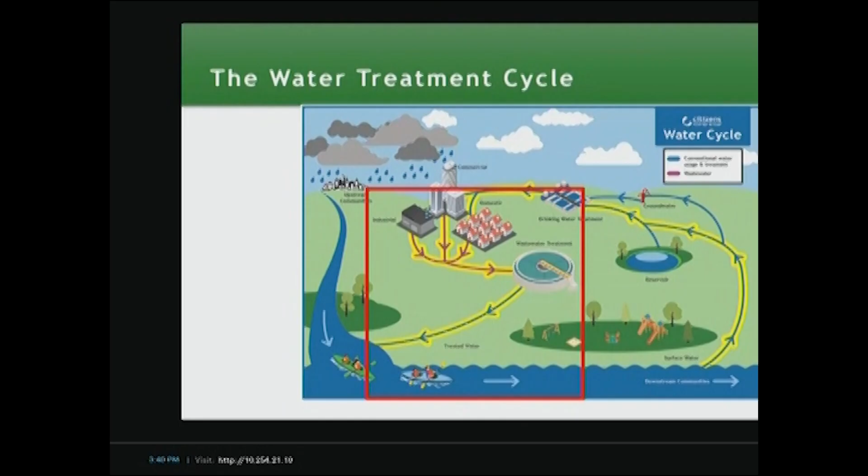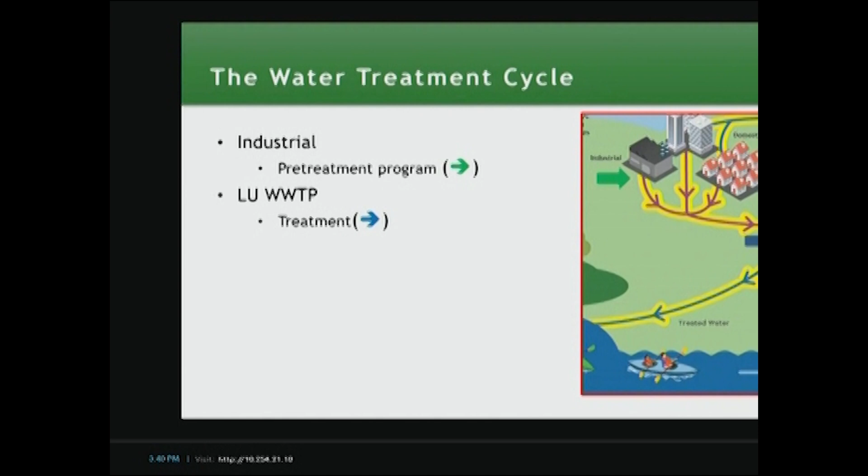The water cycle itself is protected in a couple different ways, which we'll describe each of today, and that is both via the industrial pretreatment programs that are in place by Lebanon Utilities, as well as the Lebanon Utilities wastewater treatment plant.

Overall, what we're here to talk about is watershed thinking. We're bringing water from the White River watershed into Lebanon, which is in the Sugar Creek watershed. Instead of returning that water solely to the Sugar Creek watershed, we're going to recycle it back into the White River watershed to return it to its source of origin.

Ultimately, the goal for this is to sustainably provide water for central Indiana, to protect Eagle Creek and the watershed's water quality, protect the Eagle Creek reservoir water levels, and continue the relationship that Citizens has had for over 70 years in the operation of Eagle Creek.

The water that we're talking about today is treated water. It's governed by a strict NPDES permitting process implemented by IDEM. Water must be regularly monitored to confirm that it is fit for both human and ecological health, so we're not impacting either.

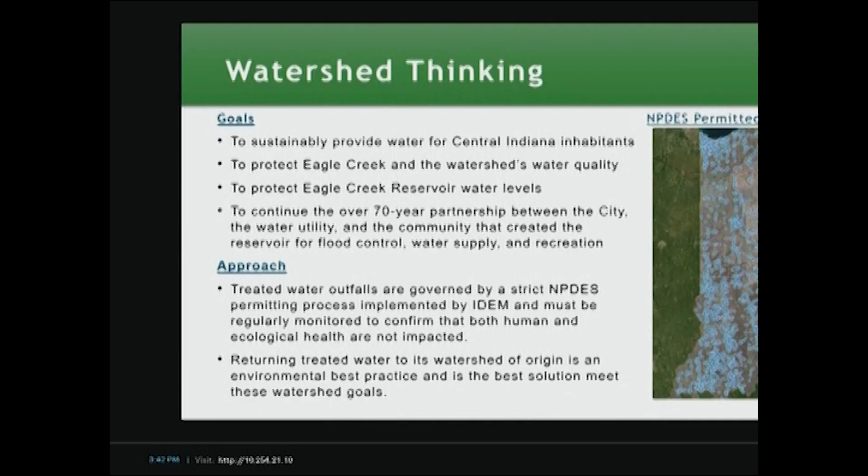Returning water to its watershed of origin is an environmental best practice, and it's the solution to meet these watershed goals. The figure to the right demonstrates how many different water reclamation facilities there are throughout the state of Indiana.

I'd like to make sure we're talking apples to apples with some key definitions today. Drinking water: water that's been disinfected to a drinking water standard. Wastewater: water, either municipal or industrial use, that has not been fully treated. It's been used and is being returned back to a treatment process.

Clean water or treated water is water that's been fully treated through a publicly owned treatment works. An indirect discharge is an industrial discharge that is discharged to a POTW, meaning it's not directly discharged to the environment. A direct discharge is a POTW that is returning water to the environment via a water body.

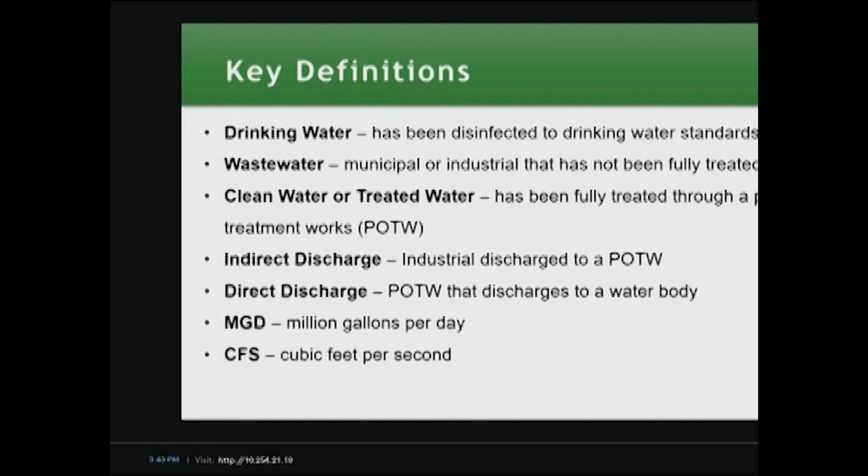The units we talk about commonly are millions of gallons per day of wastewater flow, or cubic feet per second. When we talk about water in the environment or stream flows, we typically use cubic feet per second. When we talk about wastewater flows, we use millions of gallons per day.

The expansion for the Lebanon wastewater treatment plant is coming in three phases. Phase 1 is from 5 to 10 MGD, due to be complete January 1st, 2027. Phase 2 is from 10 to 15 MGD, due to be complete January 1st, 2028. Phase 3 is 15 to 20 MGD, scheduled for sometime in 2031.

These expansion increments meet the LEAP, or the water being supplied to Lebanon by Citizens. The treatment plant is being done with biological nutrient design. It's going to provide full tertiary treatment as well as ultraviolet disinfection for all waters, and some segment of those waters will be returned back to the White River watershed.

When we talk about the watershed balance, what we're depicting here is the watersheds, or where the water ultimately goes. The difference between Sugar Creek and the White River watershed, although both return to the Wabash River, is that Sugar Creek flows west and then to the Wabash, while the White River flows southwest through the southwestern portion of the state.

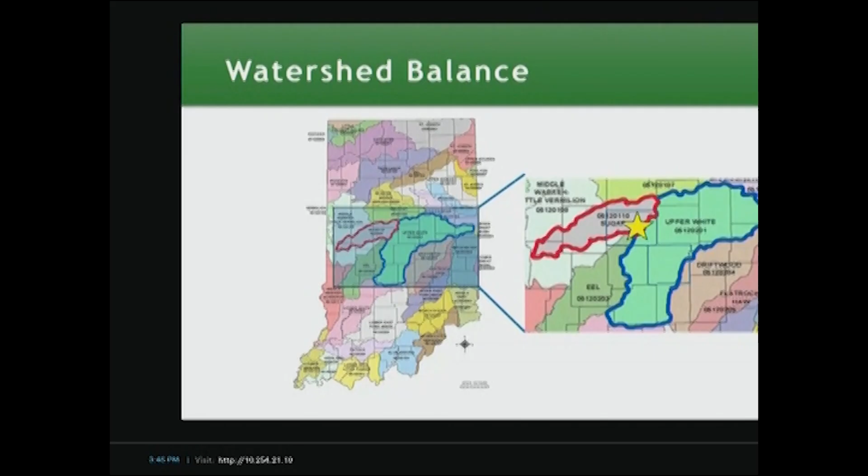What's critical here is that not only are we returning water back to Marion County, but we're returning water back to all the counties downstream of Marion County as well. There are multiple drinking water and other water uses of that water as we move downstream.

The watershed balance, or the reason we're doing this, stems from a water supply and interlocal cooperation agreement between Citizens and Lebanon Utilities to try and maintain that water balance. What's being considered is an average conveyance of 15 million gallons a day, or a peak conveyance of 25 million gallons a day, based on how much water Citizens is providing to Lebanon.

From a Lebanon perspective, the wastewater treatment plant's treated water conveyance will either go to Prairie Creek, the current location for discharge, or back into the upper White River watershed via Eagle Creek, which is the proposed additional location for the effluent force main discharge. All of this water is regulated by the Clean Water Act from the EPA.

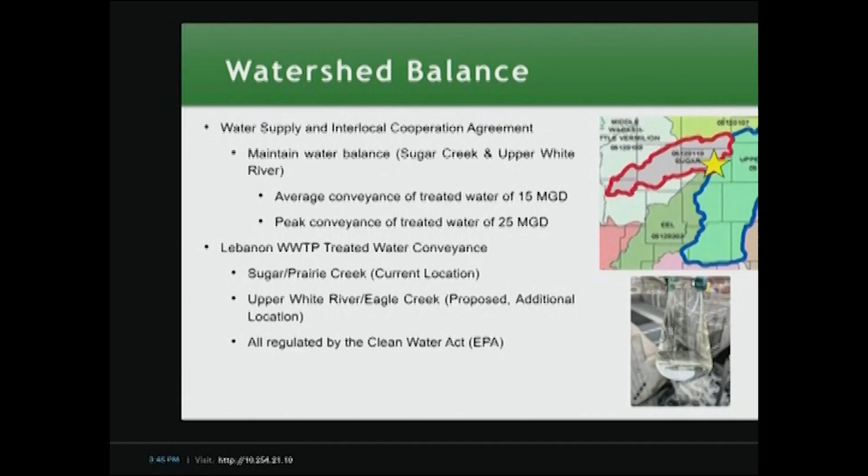When we considered where to discharge this water, we looked at the Upper White River watershed immediately adjacent to Lebanon to figure out where we could safely discharge this much water. From that, we reviewed 7 different potential locations based on routing and proximity to Lebanon, evaluating both hydraulic capacity and water quality.

Selection of the most suitable outfall locations was based on several criteria, but primarily stream flow, because we want to understand the implications for the stream as we return this much water. In low flow conditions, we recognize we will become the stream, and we don't want flooding implications during high flows either. We don't want to impact people in low flow or high flow conditions.

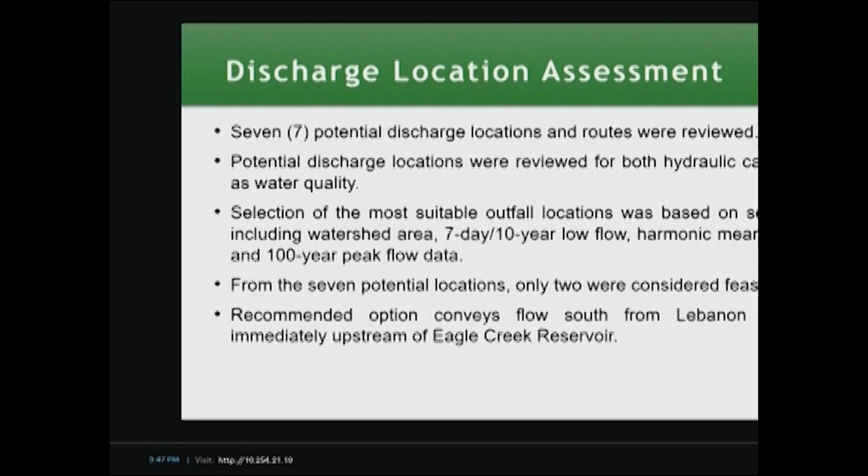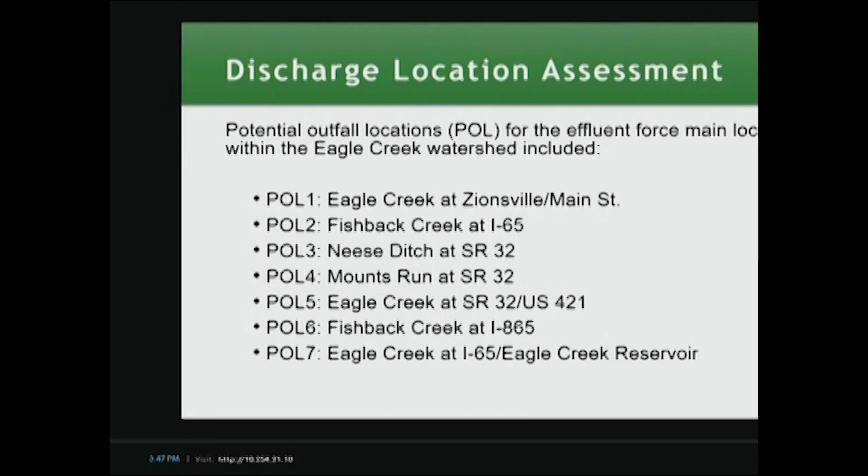From these 7 potential locations, really only 2 were considered feasible. The recommended option was to flow south from Lebanon and discharge immediately upstream of Eagle Creek. The 7 locations we reviewed were: Eagle Creek at Zionsville, Fishback Creek, the most adjacent location, Neese Ditch, Mounts Run, Eagle Creek at 32 and 421, Fishback Creek at 865, and Eagle Creek directly in the reservoir.

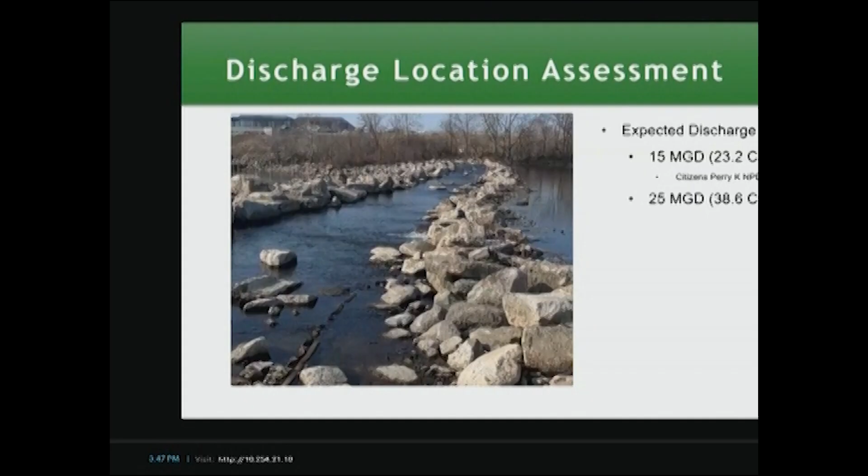One helpful thing for folks is to picture what the volumetric flow looks like. 15 million gallons a day seems like a very large flow, and that's 23 CFS. So when we look at what 15 million gallons a day looks like in the environment, this is a video demonstrating that flow as it's released into the environment, from a facility discharging into the White River.

Just for context, you walk at about 3 feet per second. So if you take a standard door and flow 15 MGD through it, that flow would be moving at about 2 feet per second. So from a volumetric perspective, that's an idea of what that looks like.

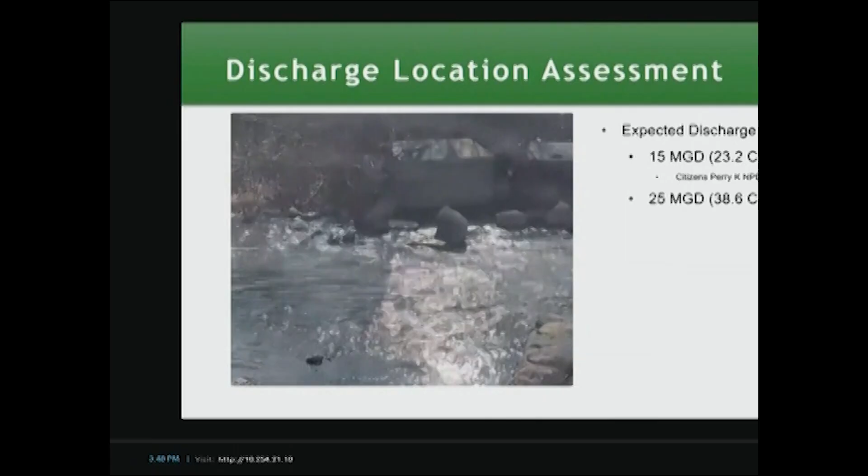Looking at the different stream statistics, the overall driving force that took us to the Eagle Creek Reservoir was recognizing we would, in many cases, be the stream - not unique in a wastewater discharge situation. But generally the upper limit, the flooding concern, was what really drove us down to Eagle Creek, since many streams immediately proximate to Lebanon simply can't handle this much volume. That's why we had to go south to Eagle Creek.

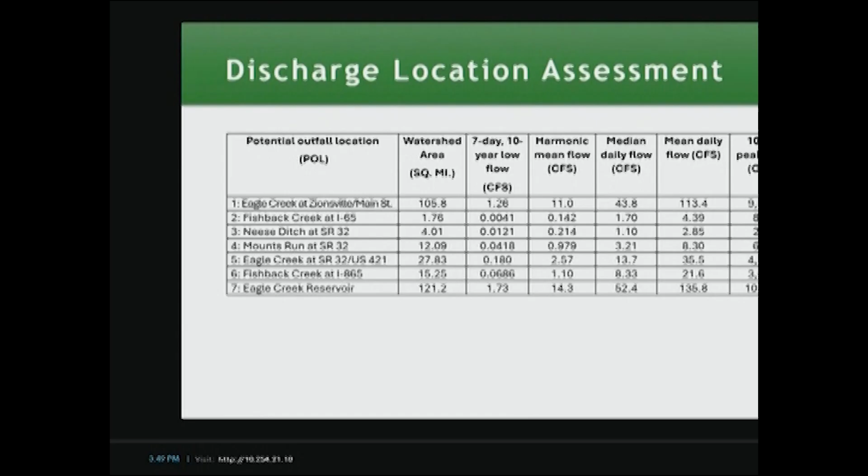Looking at the different statistical flow variations in the creek, the 23 CFS we're proposing to discharge at Eagle Creek Reservoir into Eagle Creek means that in low flow conditions we will be a significant portion of the stream, but during high flows we'll only be a fraction of it. On a percentage basis, we'll be about 44% of the stream during low flow conditions, but during flooding conditions we're somewhere between 1 to 0.2% of the stream. So realistically, from a flooding perspective, there's very low risk there.

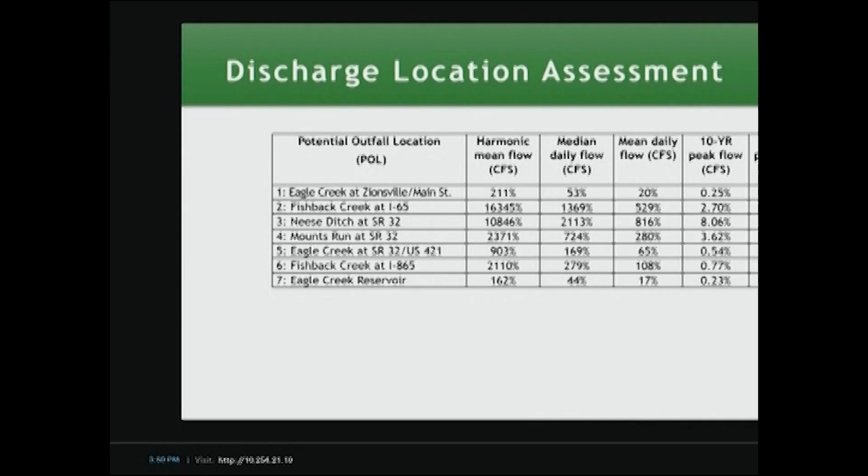From a project perspective, on the schedule we're on, we submitted a PER in January of last year. We're in the process of design, we have survey done for potential routes and are evaluating those now. Right now we're working on an anti-degradation demonstration that we'll describe shortly. We're anticipating being in operation by January of 2029.

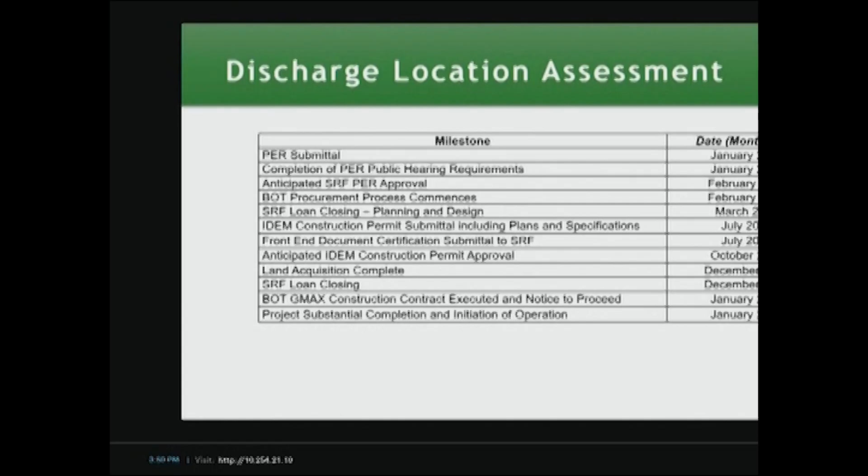So let's take a step back really quick. We've talked about the volumetric perspective - let's talk about the protections for water quality. We're going to start with treatment at the POTW, and then move upstream to talk about industrial protections as well.

Treatment is governed by what is called a National Pollutant Discharge Elimination System permit, or NPDES permit. Ultimately, this permit is designed to ensure the discharge does not hurt water quality or people's health - that's what this permit does. The other important concept to remember is that everything we do from a regulation and wastewater perspective is at the end of pipe. So all the water quality criteria we have to meet is directly measured at the end of pipe and doesn't have the advantage of dilution - it's directly what we contribute to the stream. And when we are the stream, that water quality has to be met at all times.

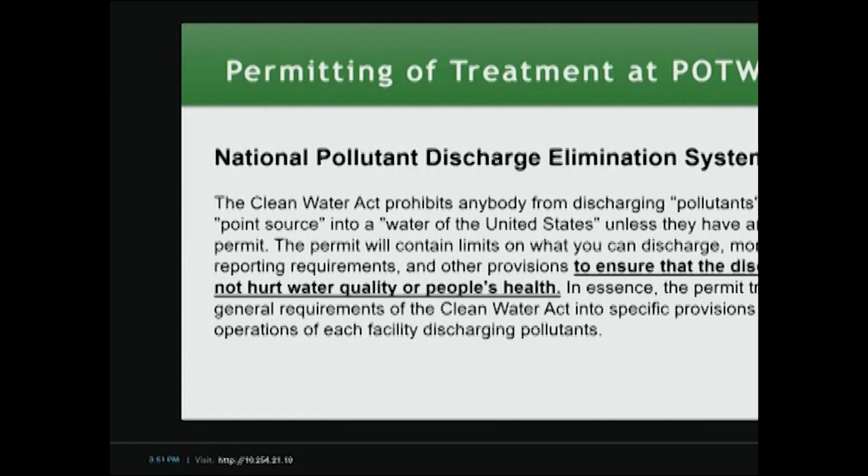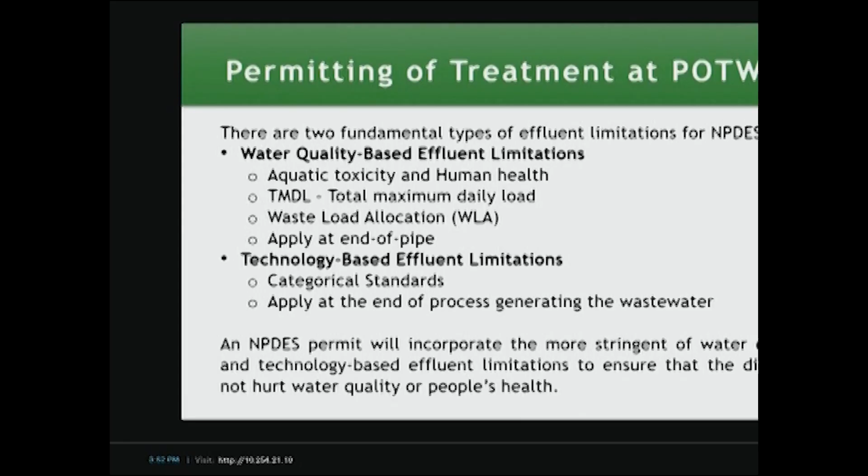There are two types of effluent limits given via an NPDES permit: water quality-based effluent limits (WQBELs) or technology-based effluent limits. In this case, the discharge will be governed by water quality-based effluent limits, designed to protect aquatic toxicity and human health. They assess the total maximum daily load to a water body, starting with a waste load allocation. Regardless of the type, the most stringent effluent limits will always apply and be given to the utility.

From a permitting perspective, we've written to IDEM and asked for a waste load allocation, which establishes preliminary effluent limits. This is the first time IDEM gives us the effluent limits, which we did in 2024, so we know what those limits will look like for the Eagle Creek discharge. When IDEM issues the preliminary effluent limits, it triggers an anti-degradation review, which we'll determine in just a second. That's our first step.

The next step is the actual anti-degradation demonstration, where we have to prove to IDEM that the water quality will not be lowered. We're in the process of submitting that right now. After that, we go through construction permitting, where we demonstrate to IDEM that we've met the standards and have treatment in place that will meet the effluent limits. Then an NPDES permit is issued prior to initial operation of the facility.

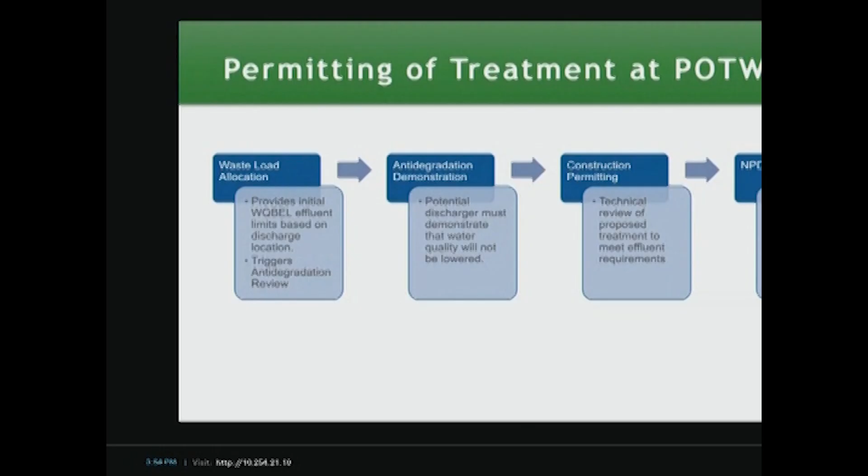The anti-degradation demonstration in this case is triggered by the potential for additional nutrients into the reservoir. Indiana has a statewide anti-deg policy, subject to review by the US EPA, which requires this for all states. The anti-degradation policy is designed to protect high-quality waters of the state, protect aquatic and wildlife uses, protect existing and recreational uses, and prevent physical modifications, largely temperature in this case.

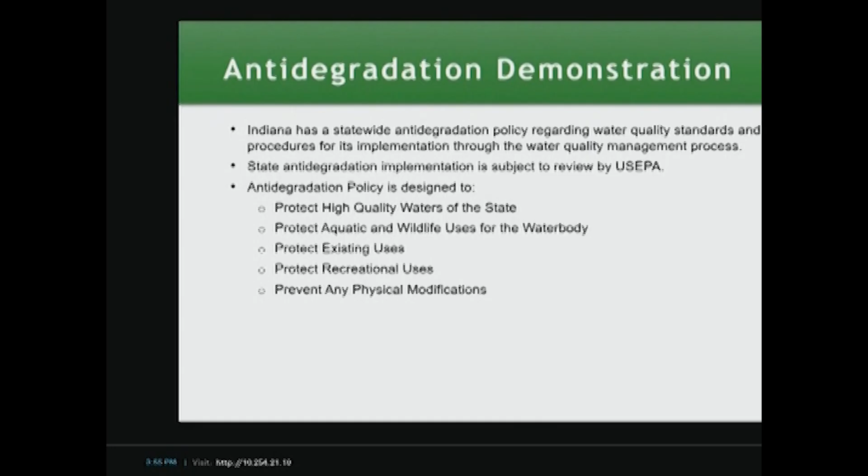One of the things the anti-deg process does is, when submitted to IDEM, there will be a great deal of public comment associated with this. It will be open for comment, there are mandated public presentations required, so there will be a great deal of public input as well.

After we get through the anti-deg demonstration, what protects the water going into Eagle Creek is enforcement. The NPDES permit is fully enforceable, and it requires that Lebanon Utilities sample the discharges daily and notify EPA as well as IDEM of all the results taken. So you have to demonstrate compliance with the discharge.

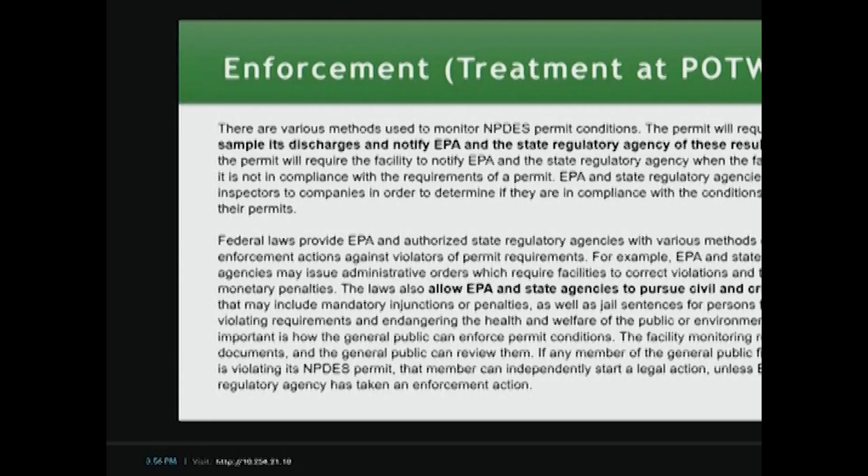It's important to note these discharges aren't taken lightly. There are civil and criminal penalties associated with noncompliance, and it allows both IDEM and EPA to step in and enforce these permits. So there is a great deal of oversight associated with these discharges. As far as compliance goes, I would pit Lebanon up with any plant in the state with respect to their compliance record. You all have the advantage of a very well-run and well-operated wastewater utility.

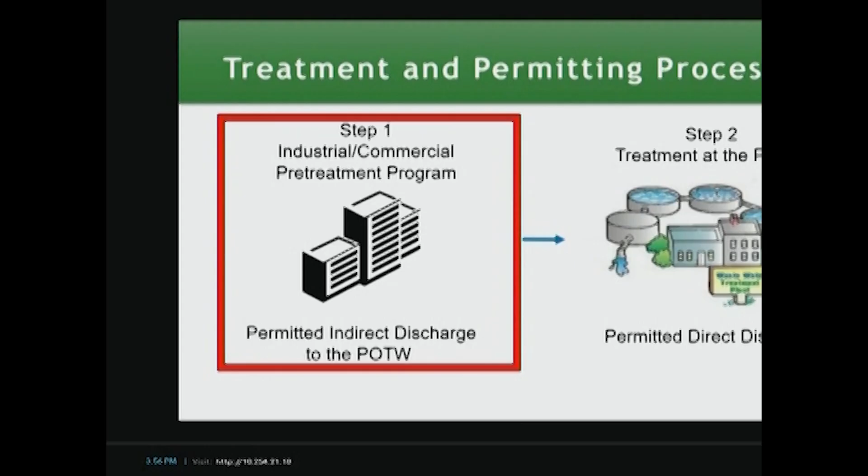But let's switch gears and look at the industrial side. We've talked about how the discharge to Eagle Creek is protected via the NPDES permit. What protects Lebanon Utilities from the additional industry we're seeing grow in Lebanon? There is a pretreatment program, which applies to industrial and commercial discharges other than sanitary discharge into the POTW.

The pretreatment program has three objectives. First, it prevents introduction of pollutants into a POTW that interfere with the operation of the wastewater plant. Second, it prevents introduction of pollutants that will pass through without treatment. And the last is to improve opportunities to recycle and reclaim water.

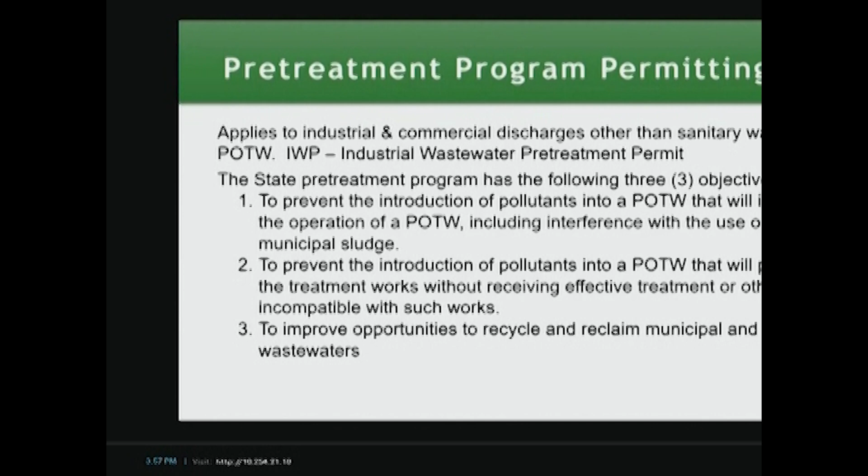Lebanon Utilities has what is referred to as a non-delegated pretreatment program, which you've had in place for quite some time. A non-delegated program means Lebanon administers the program, including IWP permits as well as the local industry. You all are responsible for records compliance, compliance inspection, independent sampling, and some degree of enforcement of all the permits. The actual permitting authority is IDEM itself, which writes the permits and has additional levels of enforcement.

The enforcement line is generally drawn so that Lebanon Utilities can immediately cease discharges for noncompliance. So if there is a problem or a problem-child utility, Lebanon Utilities personnel can step in and immediately cease discharge.

Lebanon Utilities cannot terminate a permit, because it did not write the permit. Only IDEM can step in and write or terminate a permit for noncompliance. Interestingly, IDEM can enforce noncompliance on both Lebanon Utilities and the industry, so there's a level of enforcement above and beyond the NPDES permit.

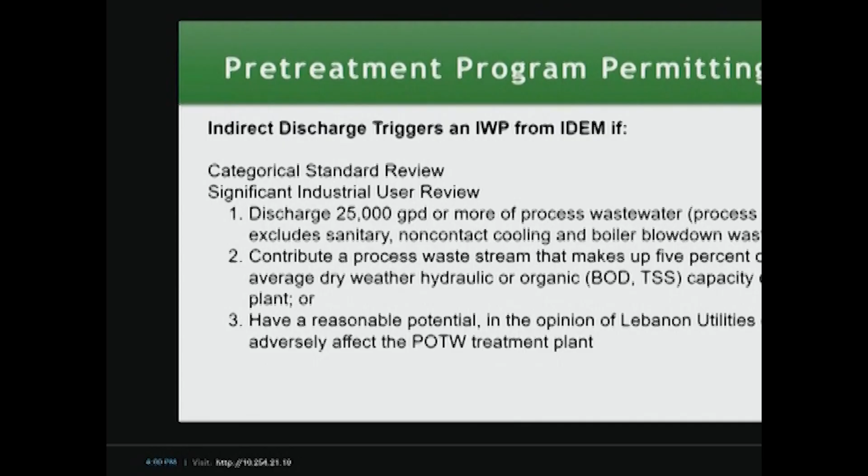If a discharge is 25,000 gallons a day or more of processed wastewater—excluding sanitary, non-contact, or boiler blowdown wastewater—that discharge immediately gets an IWP permit. Second, if the wastewater contributes more than 5% of either the average dry weather hydraulic or organic loadings to a wastewater treatment plant, or third, has the reasonable potential, in the opinion of either Lebanon Utilities or IDEM, to adversely affect the wastewater treatment plant. So those are the three types.

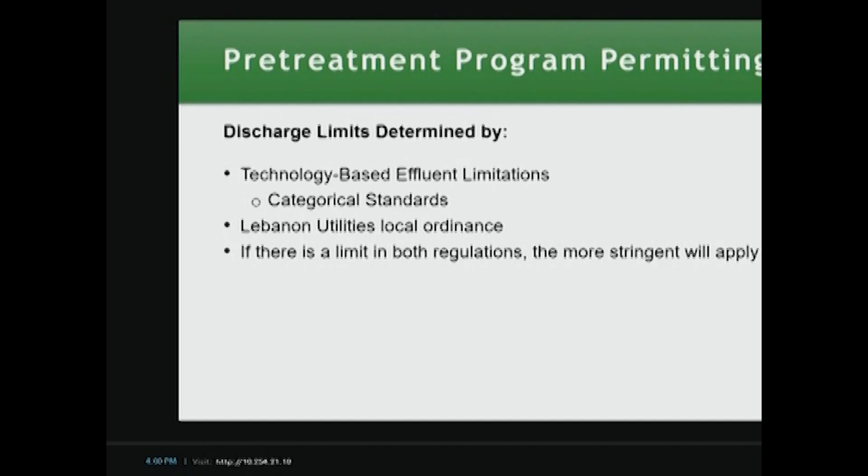Discharge treatment limits are dictated by either technology-based effluent limits, which are categorical standards, or the Lebanon Utilities local sewer use ordinance. If there's a limit in both regulations, the more stringent of the two applies.

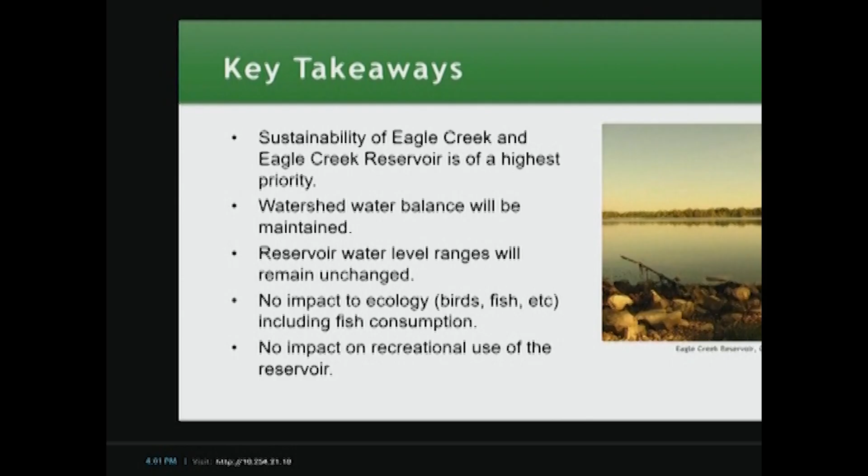So, in conclusion, the key takeaways: the sustainability of Eagle Creek and the Eagle Creek Reservoir is the highest priority for both citizens and Lebanon Utilities. The watershed balance needs to be maintained. The reservoir level ranges will remain unchanged, and there won't be an impact on the ecology—birds, fish, et cetera—including fish consumption, and there is no anticipated impact on the recreational use of the reservoir.

All right, thank you, Bob. Questions for Bob? I have one question, Bob. We're expanding our plant to a maximum capacity of 20 million gallons a day.

And if I understand what you presented, we will deliver from the wastewater treatment plant up to 25 million gallons per day? Correct. Explain to me the math difference there. So the 20 million gallons a day is the 5 MGD of existing capacity for average daily flow, plus the 15 MGD of average daily flow capacity coming into Lebanon.

The peak flow capacity is going to be met by the different peak flows, depending on how much water flows into Lebanon. Or, in cases where it's less than that, it needs to be a fraction or an allocation based on the different water sources—who's putting what where.